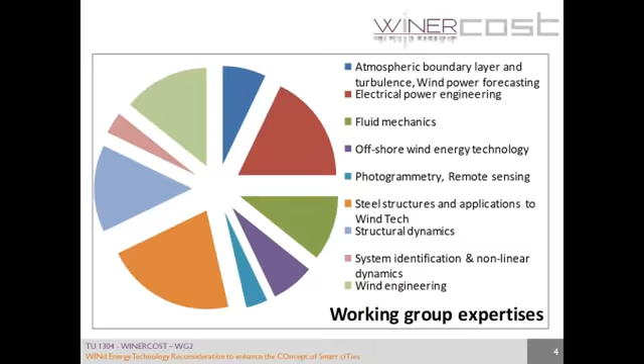But the good point is we had the possibility to have expertise in a variety of sectors, going from atmospheric boundary layer and turbulence, wind power forecasting, electrical power engineering, fluid mechanics, offshore wind energy technology, photogrammetry, steel structures, applications to wind technology, structural dynamics, also system identification, and wind engineering. So we wanted to make sure of the more effective expertise to proceed on the

research exchange in the action, and as must be done when dealing with a technology transfer or knowledge transition, we started from a need analysis, which was divided in power and energy production examination, analysis of technology readiness level for built environment, and then integration at the building scale for wind energy projects, and trying to come up with a value proposition.

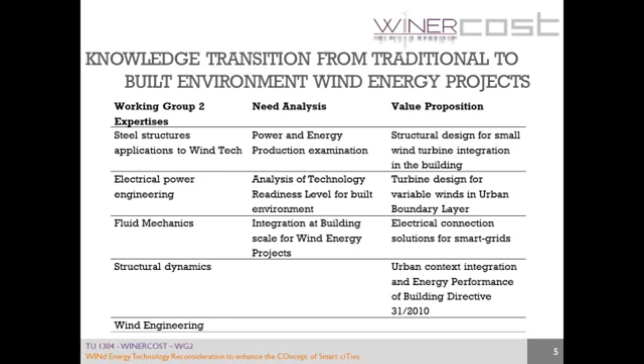So, according to the different disciplines involved, structural design for small wind turbine integration in the building, but also turbine design for specific variable winds in the urban boundary layer, and electrical connection solutions for smart grids. We'll not have the time in this presentation to get into details on this, but this afternoon a member of Working Group 2, Professor Dr. Todorovic, will report in this conference. And then, last but not least, urban context integration according to the Energy Performance of Buildings Directive of the European Community.

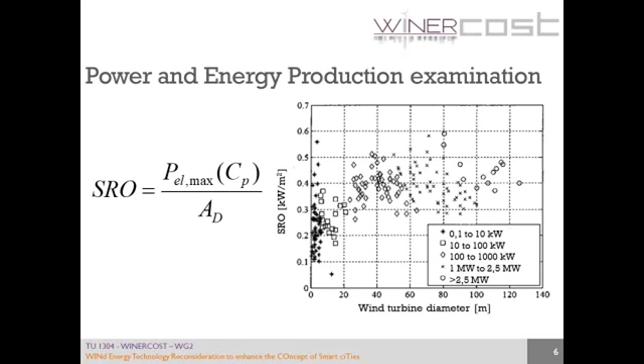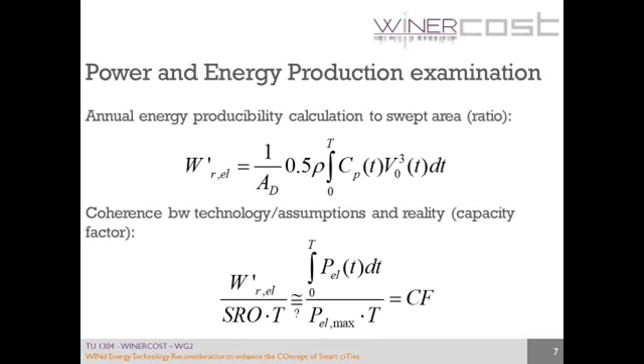So, going to power and energy production examination. Just one interesting thing, if we look at the specific rated output, we can see that in the range of the urban scale wind turbines, so 1 to 10 kilowatts, 10 to 100 kilowatts, there is the major dispersion of data, to see a good coherence between our assumptions, so the energy producibility divided by the specific rated output, and the reality, so the real monitored energy data. So are we able to have a good capacity factor in the urban context?

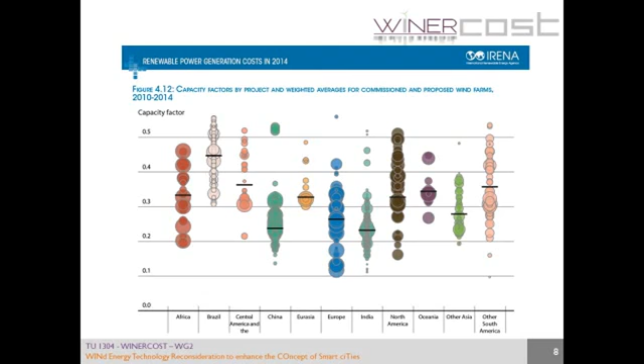So if you look at the data from IRENA, for instance, for big wind farms, already you can see low capacity factors, widespread across the regions of the world. But the bad part is that, due to the turbulence intensity of the urban boundary layer, nowadays it may happen that the urban wind turbine scale is the one most affected by the lowest capacity factors. So now in the last IEC panels, there is the recognition that amongst the most important capacity factor drivers are technology level and resource quality, meaning the turbulence of this particular wind.

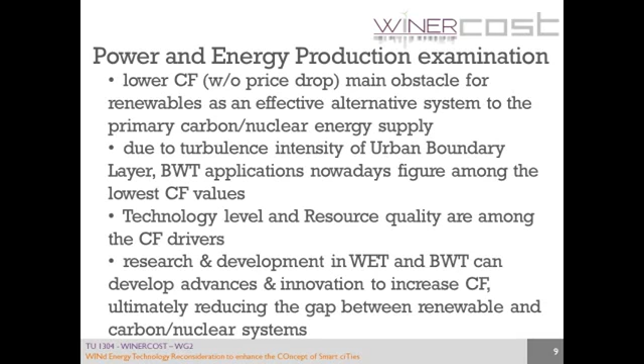So what we need to do is research and development, to have advances and innovation to increase this capacity factor, ultimately reducing the gap between renewables and, of course, the capacity factor of fossil and carbon systems, traditional systems.

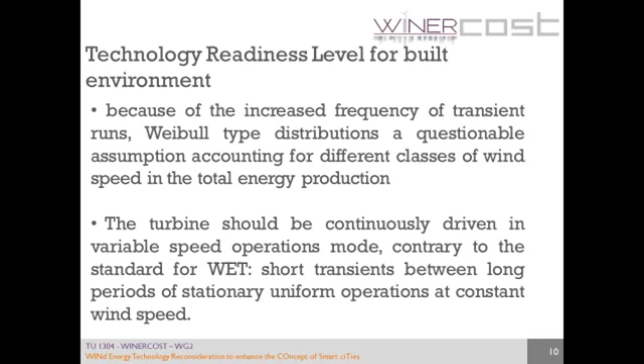The main two parts analyzing this lowest capacity factor in urban scale is because of the increased frequency of transient runs. Probability distributions are somehow questionable to account for different classes of wind in the total energy production, because we're talking about something that is changing every 3 to 5 minutes, okay? And so the turbine should be continuously driven in variable speed operation mode, contrary to what is the standard for wind energy, that are short transients between long periods of stationary uniform operation at constant wind speed.

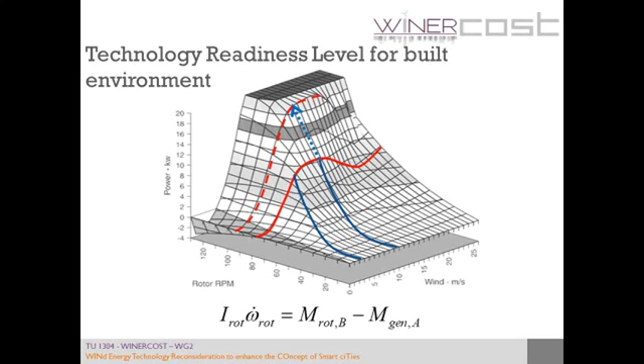So basically, variable speed operation for a standard urban scale, let's say up to 10 to 20 kilowatts turbine, is that it will be continuously run on variable speed operation. As you can see, the generator is set to a point A, then comes a gust, and you have the rotor going to another torque. So basically, a lot of inertia is involved in all these changes, because you have a lot of accelerations, which weights the inertia.

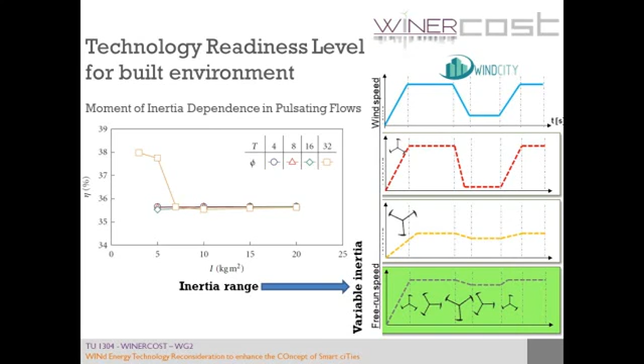So, talking about inertia, this is one of the most important driving parameters in the urban scale wind turbine. For instance, on the left you can see there is strong dependency on the moment of inertia in pulsating flows, according to research of the Nagoya Institute of Technology. And what we are doing in our activities at Wind City is we are working on a variable inertia concept, allowing to adapt as a flywheel effect to the gust of the wind.

Also, we need to consider that building integrated wind energy projects face a lot of problems about structural integration, analyzing the two families of turbines. Vertical axes are inherently omnidirectional and so are recommended from the point of view of aerodynamics in built environment wind technology. But the coupling of vibrations is much wider, a wider frequency range, because you have change of lift in the azimuth angle. Going from windward to leeward, you are completely changing the sign. So you widen the spectrum that you need to consider when you analyze the coupling effects.

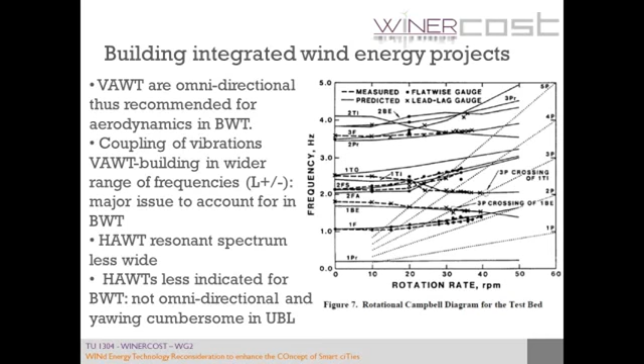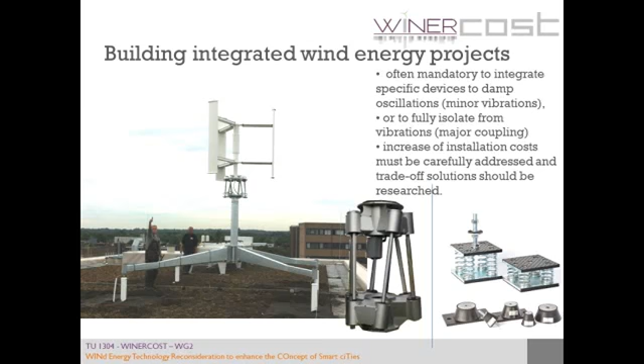On the contrary, horizontal axis wind turbines have a resonance spectrum which is less wide, but they are less indicated for integration because they are not omnidirectional, and so yawing becomes cumbersome in urban wind. So if you need to integrate vertical axis wind turbines into the rooftops, you need to consider that often specific devices are mandatory to damp oscillation in case of minor vibration, or to specifically isolate vibration from the rooftop to the wind turbine. The ones to the left are specifically designed for vertical axis. These parts go precisely on the center of mass of the vertical axis wind turbine, which is a completely different concept, and also considering costs, because installation costs are increasing.

The last part that I would like to analyze with you is what can we say of turbine design from a mechanical point of view in variable winds. Here you have the rationale for the variable pitch of a vertical axis wind turbine. As you can see on the red continuous curve, the power coefficient has an awful deep valley in the starting zone. So you can apply conventional variable pitch on the blades, which will allow you to have the dotted red curve, so you can surpass the valley, but then you will have a really low power coefficient, and you will not be able to have the optimum behavior.